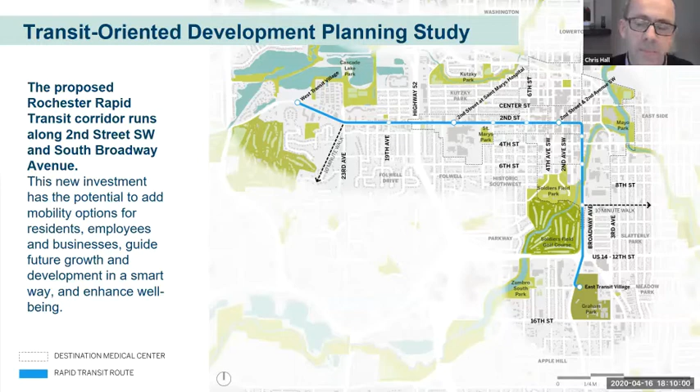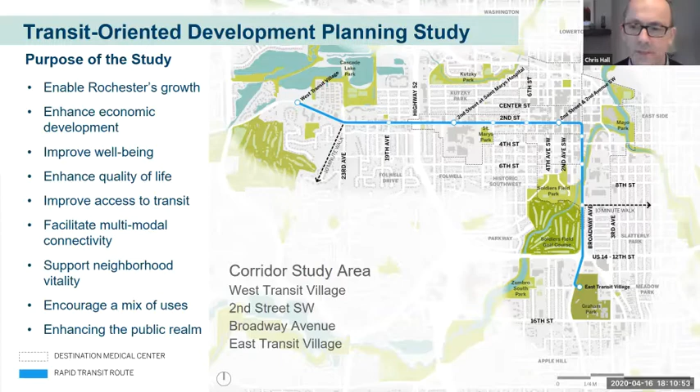The purpose really is to enable Rochester's growth and also to think about how we can advance economic objectives, which are incredibly important in this time, but also thinking about some of the other overarching objectives that we have for the city, improving well-being, enhancing quality of life, but also making sure that people can move around and have as many options for moving around Rochester as possible and this central corridor within Rochester. We do want to see very vital, active places created. We want to make sure that this works for existing neighborhoods and that there are gains and amenities and benefits for neighborhoods as well. In addition to new transit activities, thinking about public realm, public spaces, and other amenities.

And really at the heart of this is the idea of linking transit and growth locations and using each to shape the other. There's a very clear objective for the city to support a dynamic downtown, which is very strong today, but there is lots of interest in bringing more activity out onto the streets and bringing a lot of the economic and human activity into a more visible place within the city. Supporting neighborhoods and making sure they're livable and that we can also accommodate a wide range of people with different incomes, different lifestyles and different employment roles to support a diverse housing market.

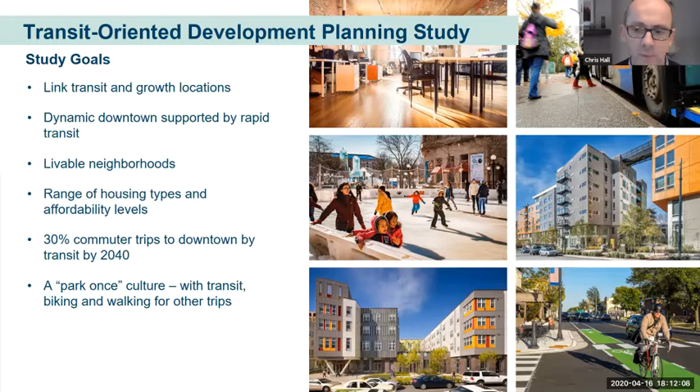We'd also like to see a shift in the number of commuter trips, which are currently carried out by people driving, often alone, into parking ramps in the center of the city, and finding other ways for people to move around. And if they do drive, to park once and then be able to move around the city through all kinds of other ways, whether it's walking, transit, or cycling.

Next. And as some background, this is not the first step in the process. This is actually the culmination of a series of steps which have identified the need for additional transit capacity and routing and rapid transit over a series of plans over the last decade or so. And these have confirmed the need for a transit system, which is what we're now looking at in more detail. And what we want to talk about in this round of engagement is looking in more detail at individual corridor segments. Tonight we'll look at the first two, what we're calling the West Gateway and the City Corridor, which are really the Second Street Corridor. And then next week we'll talk in more detail about Broadway.

But key things that we will be talking about, and we wanted to offer some definitions at the beginning. Connectivity, and this is about where stations are located and what the walking and bike routes may be. Land uses, which are a wide variety of activities, and thinking about where you locate those and how they mix together. Heights and density, which is really the scale of development. And then public realm, which is parks, riverfronts, plazas, streetscapes, the spaces that we all use between buildings. And next.

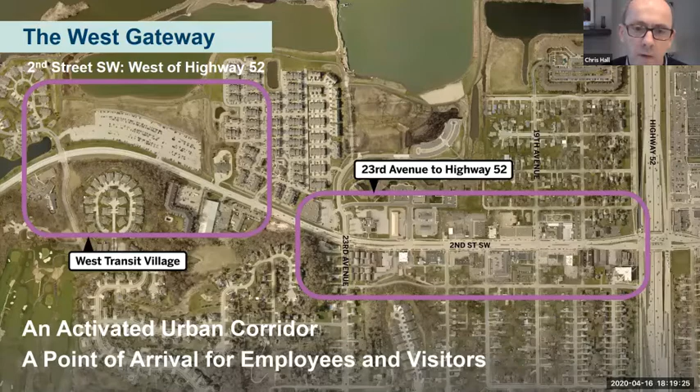And we can see this area also has a number of existing neighborhoods, some historic and some more recent vintage. And our vision for this gateway is of an activated urban corridor and a point of arrival for employees and visitors, understanding that this is a place where many, many people will arrive in the city, whether it's for work or whether it's for healthcare and other activities.

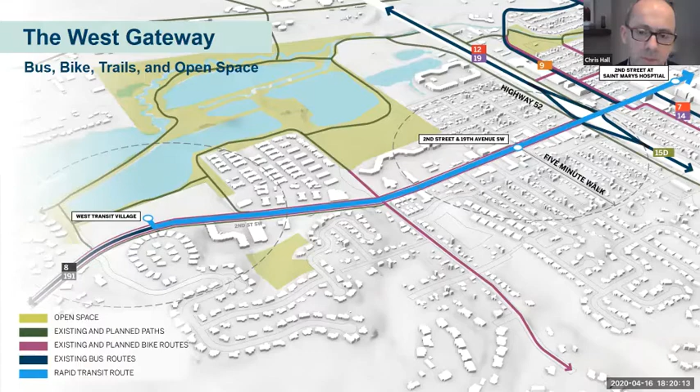And the first thing we looked at when we wanted to think about this area was, what's the connectivity framework? Thinking about what the route is today, the proposed route for the BRT, planned connections in terms of bike routes, and some existing connections, many of which run through the Cascade Lake area and the park system. It's one of the characteristics of Rochester that many of the trails actually run through major parks and along rivers and creeks through the city. But this is a framework that shows how some of those other connections relate to the bus rapid transit route.

Okay, next. And we also wanted to look at what we consider to be the opportunity sites through this whole area, and in particular, in this case, looking at the West Gateway. But when we think about opportunity sites, we want to be clear that this is a variety of different kinds of opportunities. Some might be vacant land, and we'll probably see more of that when we talk about the Broadway corridor. Some may be surface parking lots, as is the case with the West lot today.

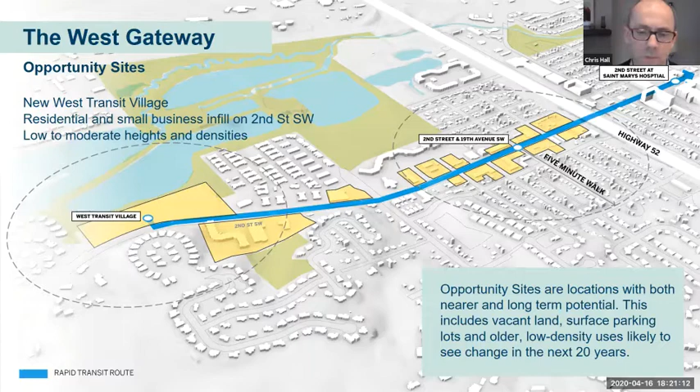And then others may be suburban developments which are relatively low density, may have their own surface parking lots which are serving smaller businesses or other activities today. And some of those may become more intensively developed in the next 20 years. And we are looking out to 2040. So we're taking a long-term view as well as looking at some more immediate opportunities.

So as we start to talk about the scenario that we have here, there were some themes that we wanted you to think about. And these are around issues of whether there should be more homes, stores, and jobs focused around rapid transit stations, and we'll show some ideas for how those work. What you think about locating the stations, specifically at the Mayo West lot and 19th Avenue, which is an area that we are starting to hone in on as a location for the station.

What other kinds of activities would you like to see at these locations? And what other biking and walking improvements are needed to make this area work? And this is an area that has largely been designed around the automobile over the last generation or so. So onto the West Village specifically.

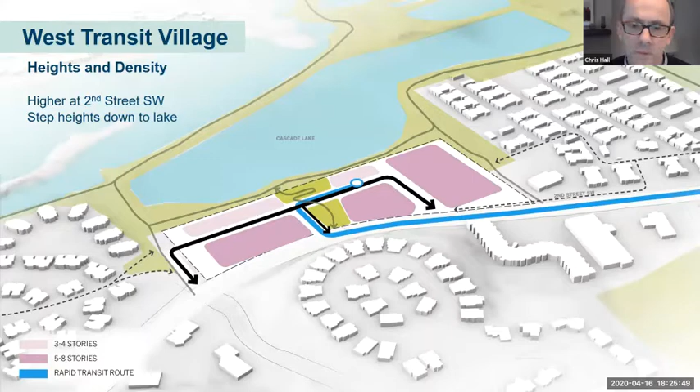And the types of heights that we're talking about here would be 5 to 8 stories along 2nd Street, and that would also be where we are enclosing parking structures with other activities. So we'd be looking to screen that parking by other activities or with very high quality architectural and facade design, and then step down to 3 or 4 stories as it comes to the lake. Okay, next.

But again, some of the same ideas about having very active buildings that face the street, where there's transparency between the inside and the outside of the buildings, very walkable streets as well, and streets that work for transit as well as for personal vehicles.

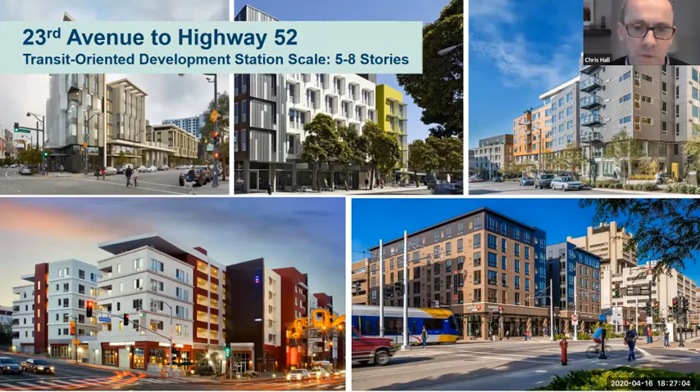And then there's the potential to step up in scale, particularly immediately around the station. And these are some examples of buildings that step up to 5, 6, 7, 8 stories. And there's an idea here that immediately around stations is the opportunity to accommodate higher density and potentially a more intensive mix of uses. Next.

So Adele, do you want to talk about the station location? Certainly. And maybe before I get into this specific station location itself, I wanted to give a little bit of background on how our team considered potential station locations. So our charge in this planning process was to take a look at where the stations should be located and to think about them from a variety of perspectives and within a variety of contexts.

So a few of the things that we considered were, does the station serve places where people want to go, whether it's places where a lot of people live or a lot of people work or a lot of people are attracted to for events. And so we looked at things like population density, employment density, development opportunities. Chris showed that slide of opportunity sites. So thinking about this both from the existing condition, what's there today, but also looking into the future, what might change in the area.

Looking at how many transit-dependent people live in the area. And then considering, is it easy to walk or bike to this station location? What does the existing street grid look like? Is it well connected to the nearby neighborhoods? How are the sidewalks? How are the bike facilities? What's the streetscape quality like?

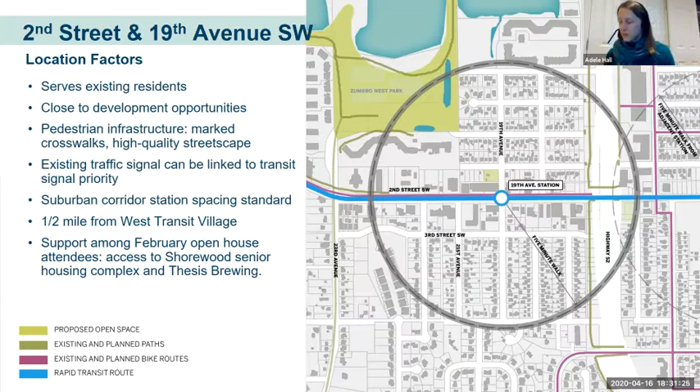So I hope I covered everything for 19th. I'll let Chris finish the story about this segment. Yeah, and thanks, Adele. You made a really good point about the quality of the streetscape here as well. And I think that is something that we would like to see extended further west as the rapid transit system comes in and as the West Lot is developed, continuing the nature of that street in terms of its walkability, its bikeability, the landscape as well.

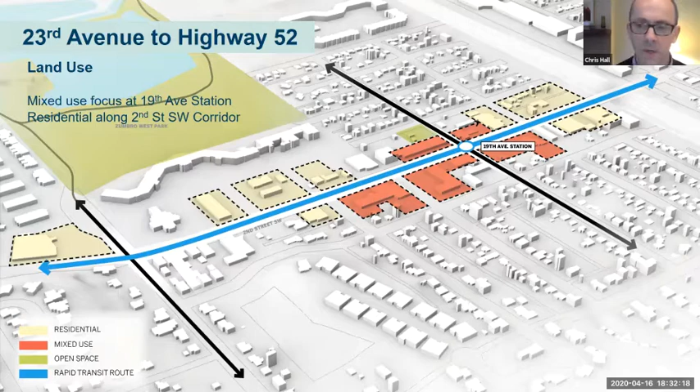So when we look at land uses for this segment, you can see that we have focused mixed use around the station and then feathered away to more of a residential idea further away. And when we say mixed use, we expect there will be a strong residential component here, but then there would be retail and other residentially led services and amenities as well, in terms of what people need day to day. And again, we'd be focusing on the station in terms of stepping up in heights. So right around 19th Avenue and towards Highway 52, stepping up to 5 to 8 stories.

And this is an area which in the future would have enhanced transit service. But there's also something about the scale of Highway 52 as an infrastructure, and the bridge infrastructure, that feels like it can handle some higher development and greater density of development, given the scale of that infrastructure. But we would step down to 3 to 4 stories further west on 2nd Street.

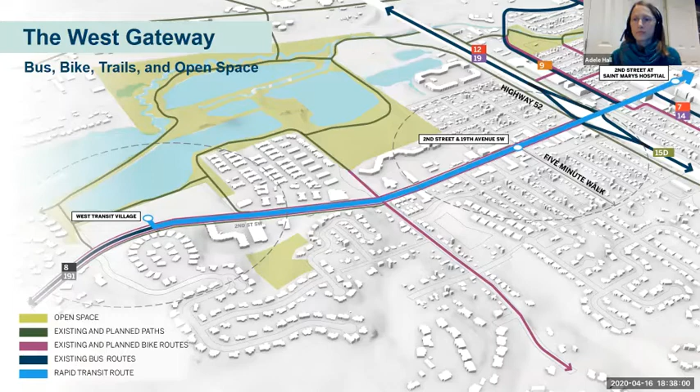It does seem like a very localized infrastructure investment, right? So in some cases you might have streets that have curb and gutter and are an urban section, and so the street section looks a certain way. Other sections might not have a curb and gutter and are more of a rural section, and so I think it'll be a very localized question of how new sidewalks get accommodated. Very good. Thank you, Adele.

I just received word from Julie, our person behind the scenes, that if you want to raise your hand and ask a question just like Joel did, we might have to give you and Julie a little extra time to make sure you get a chance to ask that question. Right now, I don't see anyone's hands raised. With that, maybe we can continue forward, Chris? Yeah, or are there some Q&As coming in? All right, yes, there are. Would you like to take one? Sure, if we can. Sure. Question from Jason here.

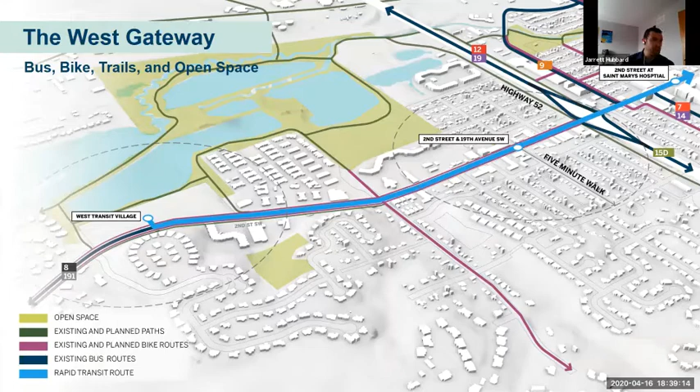At the transit hub station, are you concerned about conflicts between noise and bus movement with the station in the middle of a retail street? Would you consider shifting the open space to the west and north of the station to better orient to the lake? I think, Chris, this might be up for you.

Yeah, it's a really interesting question. So we've had some discussions about the location of the open space. I think there was quite a strong sense that you should be able to see through the site, that from 2nd Street, this is the opportunity to continue the view to the lake. So that's why there's a central space. In terms of bus movements and noise, as Adele said, these are going to be very contemporary, high technology vehicles. So we're not expecting the noise that you would normally have with clanking of gears and maybe a diesel-based bus from 20 or 30 years ago. These will be very contemporary, and so hopefully very quiet as well.

And there is a question of bus activity in the middle of the retail street, and there may be a difference in the type of retail which is on the south side of the street next to the platform and the boarding space for the bus, which may be much more around coffee and grab and go and quicker kinds of activities.

And then on the north side, it could be a slightly different kind of retail. And then there are also some ideas about wrapping some of that retail, so a little of it also faces the lake, so that there could be more of a kind of a sit-down ambience and food and beverage linked to that. But it's not unusual to have intensity of activity, and at a certain level, intensity of activity is good because it brings energy and vitality and focus.

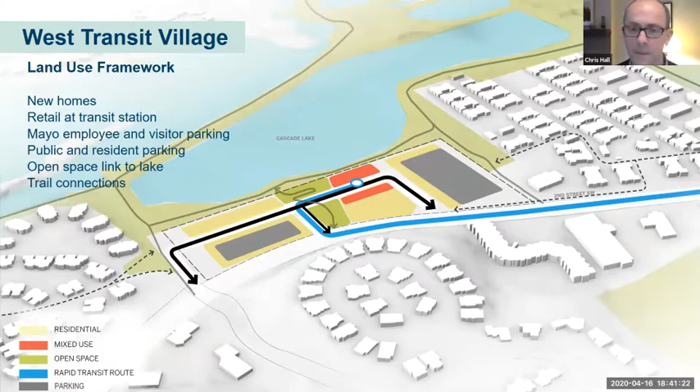So I hope that gives you some insight into our thinking, but if you have further thoughts on this, please drop us a note also. Okay. Thank you, Chris. With that being said, I think we need to move on to the St. Mary's to 6th Avenue section.

Okay. So the next section is what we're calling the City Corridor, and this encompasses the area of 2nd Street around St. Mary's campus and then connects all the way through to 6th Avenue. And we see the vision for this as being a diverse city-scale corridor with enhanced connections between St. Mary's and downtown. And when we say city-scale, one of the interesting things about Rochester is that it actually has a very defined sense of a downtown, and it's historic downtown and very strongly anchored by Mayo Clinic.

But the future is likely to see continued growth along these major corridors. And in some ways, thinking about a central city as opposed to a traditional downtown. And central cities have different relationships with corridors that expand from them. At the same time, it's really important to emphasize that the existing neighborhoods are incredibly valued.

And this is about focusing on opportunity sites, and again, surface parking lots, vacant land, other kinds of sites that have the potential to see new activities over the next 20 years. And in this case, we may be looking at some activities that are higher density.

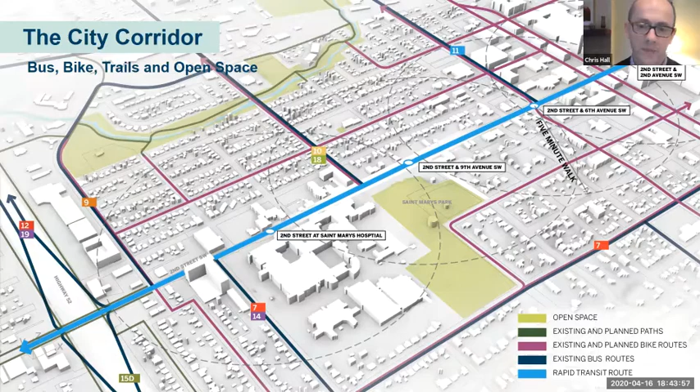And of course historically has a significant traffic role with vehicles coming from Highway 52 and connecting into downtown. And these are the areas that we identified as opportunity sites. And you can see how these kind of relate to some proposed station locations as well. One would be at St. Mary's Hospital, one would be on 2nd Street around 9th Avenue, and then one would be around 6th.

We see this area as having opportunities for an expanded St. Mary's district, more bioscience, more healthcare, more housing, more hotel, and then infill development between 9th and 6th Avenue. And thinking about 6th Avenue as a gateway, that this is kind of a gateway to the core, the historic and traditional core of downtown.

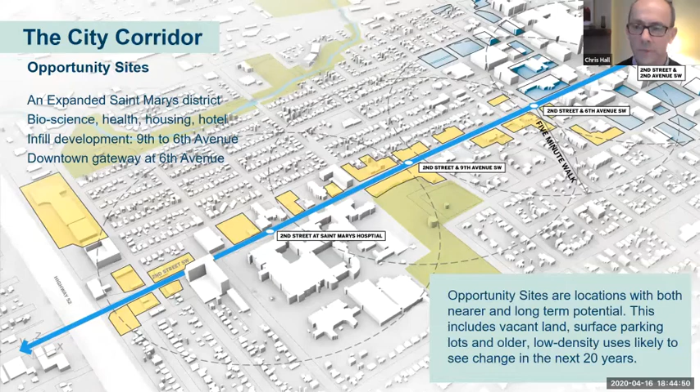Okay, next. And some things to think about as we take you through some of the other diagrams. Again, what activities could be added to benefit existing residents? So while new things come along, what is it that residents within the existing communities would like to see happen at St. Mary's, at 9th Avenue, or 6th Avenue?

What kinds of public spaces are needed for existing residents, future residents, workers? What kinds of spaces do people need? How could the St. Mary's open space be used in the future? And what bike and walking improvements are needed through this area? Okay, next. So Adele, you want to talk us through the idea for the station first?

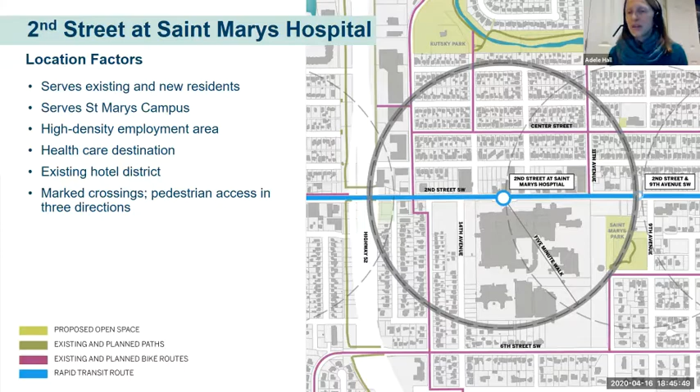Yeah, so the 2nd Street at St. Mary's Hospital station is probably pretty intuitive, I think, given the criteria that I mentioned before, especially serving places where people want to go. Obviously, St. Mary's is a major destination for employees, also for visitors, and we know there's a lot of trips that are made between the downtown Mayo campus and St. Mary's. So this is a high traffic, high ridership station.

It serves St. Mary's, but also serving Kutzky Park to the north and historic Southwest neighborhood to the south, and some of the hotel and commercial functions around there. So I think tentatively right now, part of the project is to have a transit center here, a bit bigger facility than a regular station, just because of the expected level of ridership and the number of people that would pass through on a given day.

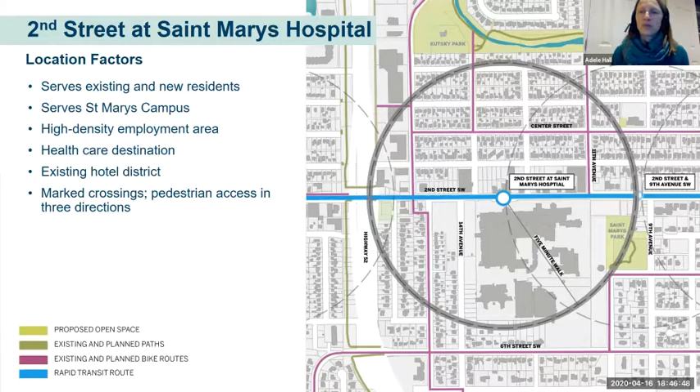A second station is planned or proposed at 9th Avenue. And this one is a much more kind of future-looking station. It is about a quarter mile from St. Mary's, and about a quarter mile from 6th Avenue, which is our next proposed station. So these stations are closer together because this area is much more dense with activity.

And one of the important features of a 9th Avenue station would be planned or proposed. I shouldn't say it's proposed, it's not that imminent, but there is about 1.5 million square feet of new development planned for in this area. The land is primarily owned by Mayo Clinic, so the development would be, you know, at their discretion.

And so there might be some interest in this station being a future station, meaning that you might put in the basic infrastructure, the underground infrastructure, when you're building the rest of the project, and then fill out the station once that development arrives and buses start stopping there once that development is realized. That's a possibility here. We did see some support for this station among attendees at the February open house.

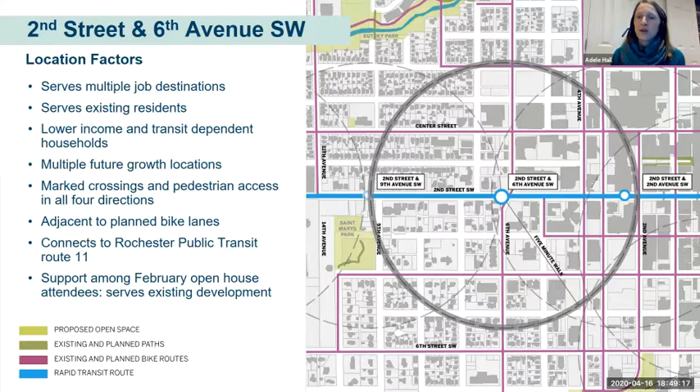So this was a pretty straightforward station location selection, and there is, I think, a plan for a hotel on the northwest corner. I know we heard directly from those folks at the February open house that they were excited to have the station in front of their building. So I think a lot of support for a station in this location.

Okay, and then just to kind of follow up on that, those ideas of stations have really helped us think about the land use and heights and densities through this area. So what you'll see is a mixed use focus at stations, but also close to intersections as well. So at 6th and 10th, and looking at residential infill between those locations.

So next. And then in terms of the heights and densities, again, taller buildings at stations, taller buildings at intersections, the places that are most connected become the most active and the densest. And then we step down in between the stations. And the lowest heights in this area would be between 9th and 7th. And there is a kind of a local character on that segment of 2nd Street, which we wanted to respond to as well.

So, I think, yeah, should we go to some questions, Jarrett? And maybe we could flip back just to the heights diagram while we're taking some of those questions so people can see those. Yeah, currently at this time, we don't have anyone with their hand raised to ask a question live, but we received a few questions via the question box. So we'll go ahead and try to tackle a couple of those until we get it live.

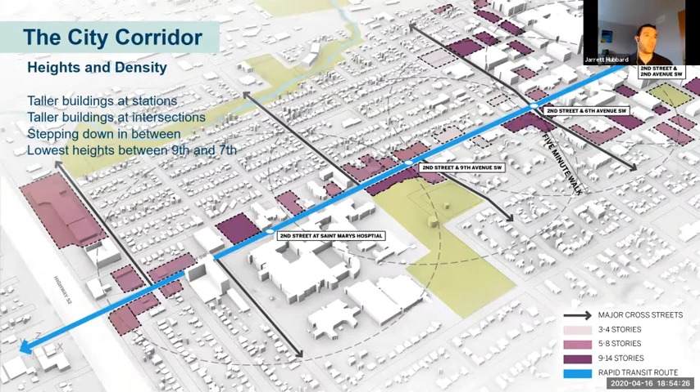Maybe this is more in Chris's wheelhouse. On the land use diagram, can you describe the dispersal of mixed use, assuming that ground floor retail, versus concentrated retail to create a destination? Yeah, and the idea here is that the retail is located immediately around stations or where you have intersections with north-south routes as well. So that's what drives the retail.

And I think the retail we're talking about here is primarily ground floor. This wouldn't be the type of retail that is a competitor to the core downtown. This is meeting the needs of local residents, workers, and visitors. And for visitors, their daily needs, and for workers, probably their daily needs as well.

But I think there is the opportunity here to think about a range of different types of food and beverage. Of course, there's breakfast, lunch, and grab and go, those requirements. But as the corridor develops, there should certainly be opportunities for dining and evening food and beverage also.

And you'll notice that we've focused employment in this area close to the proposed 9th Avenue station, and then also close to 2nd Avenue as well. And this is in some ways to respond to a lot of input we had about the level of movement during the day and during working hours between the core downtown and Mayo Clinic and St. Mary's. And we expect that to continue.